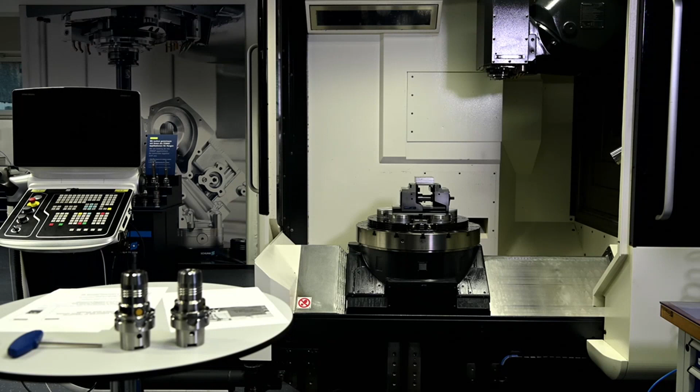Welcome, ladies and gentlemen, and dear guests of IMTEX 2023, to my talk about Schunk intelligent tool holding and work holding solutions and how they increase productivity of unmanned intelligent machining processes.

We from Schunk, from the headquarters here in Germany, as well as from our subsidiary in Bangalore, India, want to illustrate a path towards more autonomy in industrial devices and machine tools by the use of intelligent components in the field of clamping and gripping technology.

When I started driving a car in the 1980s, I had to plan my road trips with a road map, and it was a completely manual process of planning and control. Later, I was able to use Google Maps for automatic planning of my trip, but still a manual control if Google Maps was able to manage the right way.

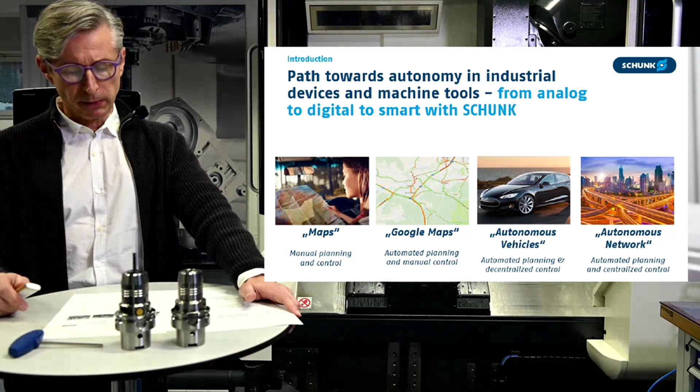Today, we can use autonomous vehicles for automatic planning and decentralized control. And tomorrow, we might have an autonomous network of automated planning and centralized control in our overall traffic.

This scenario is similar to the situation in machine engineering when working with machine tools. Even today, we use mechanical devices like tool holders, grippers, vices, lathe chucks, fixtures, whatever.

To make the best out of those mechatronic devices, it would be clever to equip them with additional sensor technology and let those sensors communicate with the machine control.

In a machine tending process, it's fundamental that the machine control knows if a clamping force block is opened or closed to avoid damage during loading. And monitoring systems should report the proper position of a workpiece inside a clamping device before the cutting process starts.

These connected intelligent devices are the basis for the final step: AI-enabled processes, online learning, connected machines for the future of autonomous solutions.

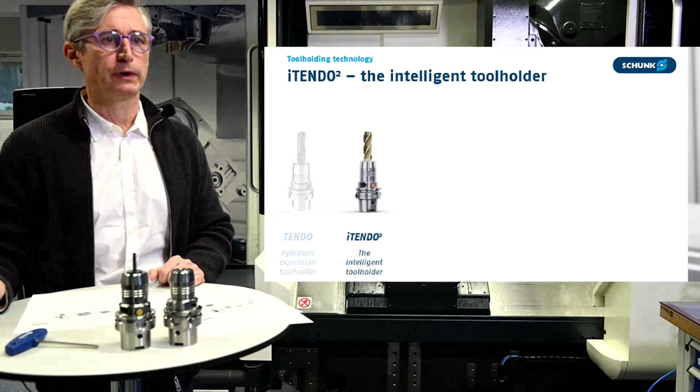We equipped this tool holder with some additional features and made the iTENDO² out of it. We integrated, in a first step, an acceleration sensor right in the middle of the center axis for monitoring vibrations occurring during a machining process.

And of course, we need a rechargeable battery for 8 hours of continuous work and 10 days of standby time. That all makes together an intelligent real-time sensor system for easy process monitoring and maximizing the tool service life of the tools you are using: drills, mills, other tools.

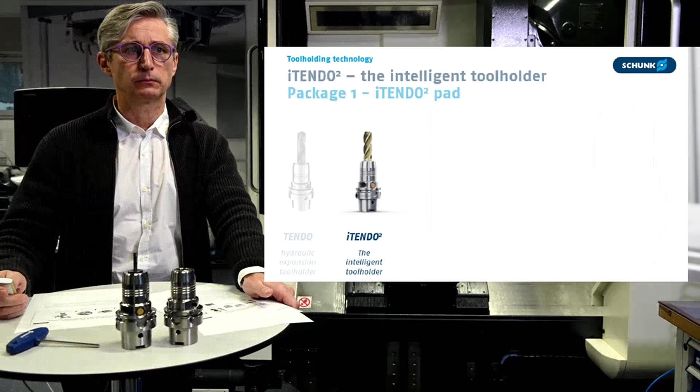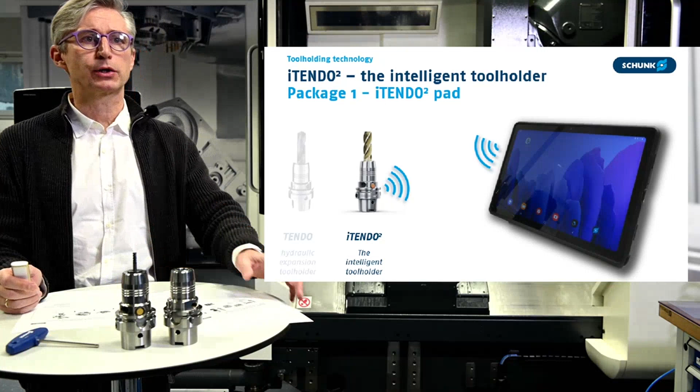To get a deeper understanding, you have to know we have 3 different packages of this iTENDO². Currently already on the market since last year is package number 1, which we call the iTENDO² Pad. So to have a better idea what is behind the iTENDO² Pad, let's have a look at the video.

You see, this is the case of how we deliver the iTENDO² Pad. The case has one of the iTENDO² tool holders plus a small tablet PC, and both can be connected via a Bluetooth system.

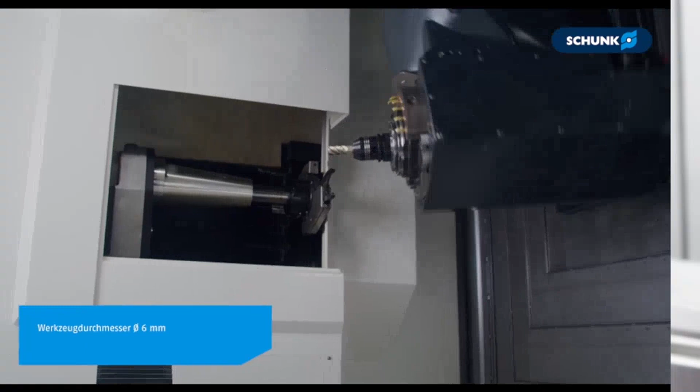Once the iTENDO² is connected with the tablet PC, we can monitor what we call the chatter marks. We started a process just by using the standard parameters recommended by the tool manufacturer, and we were able to see we have, of course, a certain level of chatter marks.

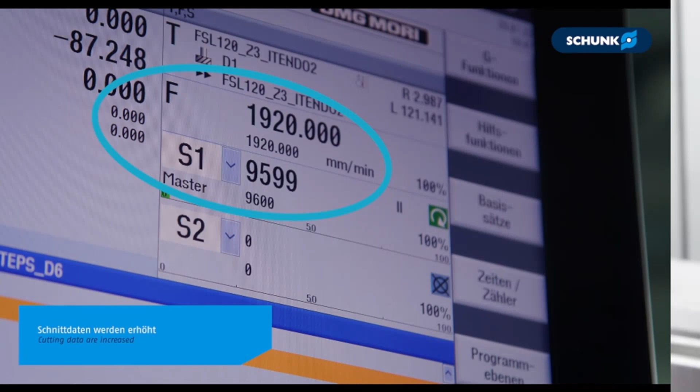Thereafter, we increased parameters, speed, and so on, and we were able to see the level of chatter marks even increased. So we can expect a shorter tool life and a less good surface quality.

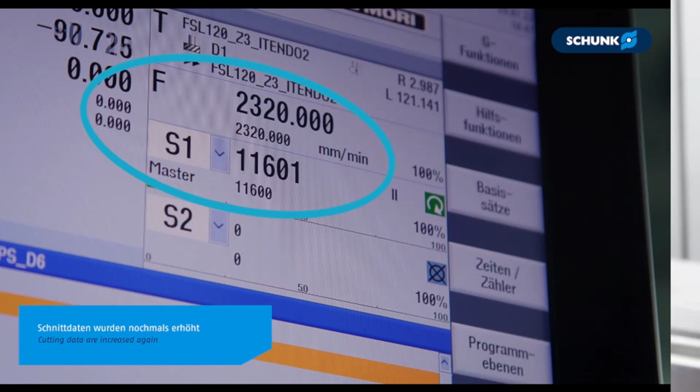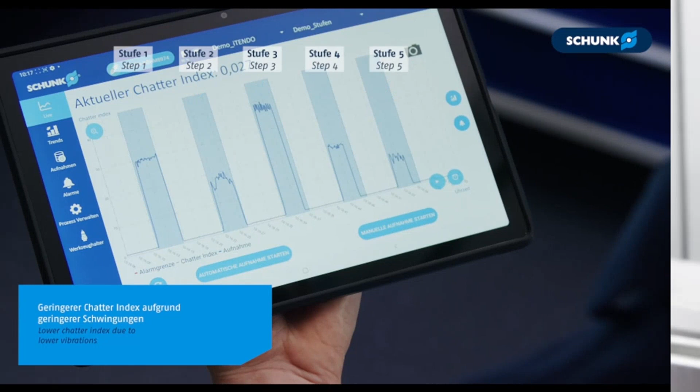But then we further increased the parameters to the next step so that we have an even faster process. And surprisingly, we were able to see that the chatter level, the level of vibrations, went down dramatically.

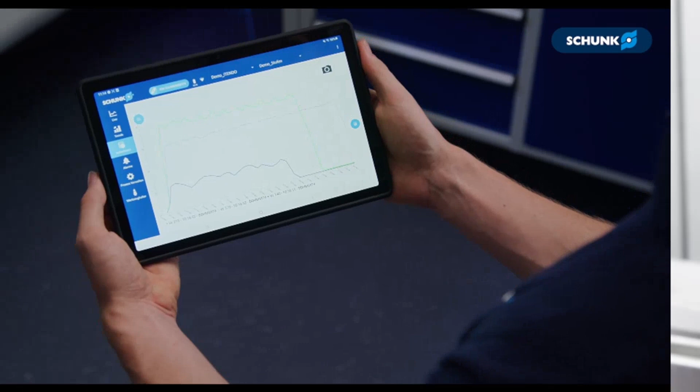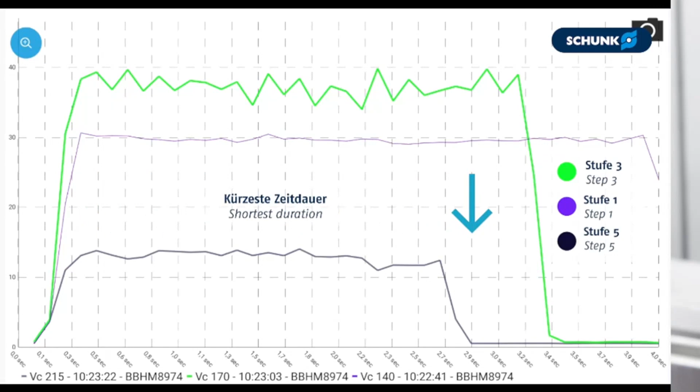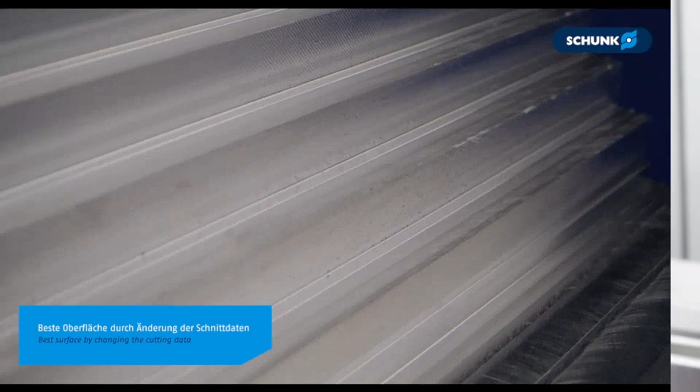So you can use the tablet PC to compare the different results. You see we have step 1, 3, and 5, and in the last step, step 5, we had the shortest duration of the process and the lowest level of vibrations. So this first package, the iTENDO2 Pad, gives you excellent manual control to adjust your cutting processes.

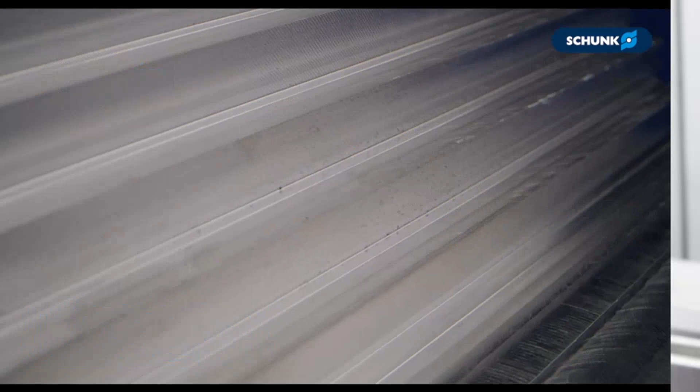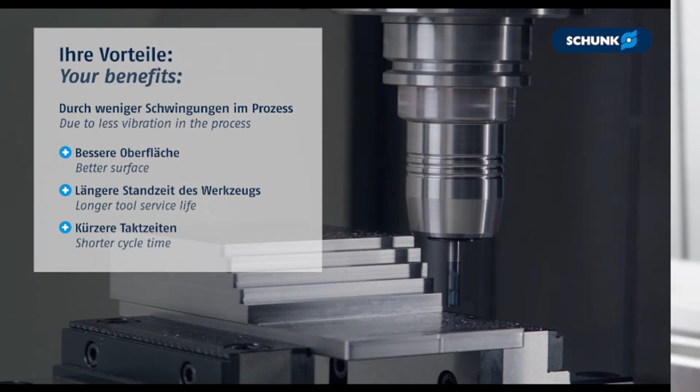It doesn't matter if it's a drill process, a milling process, a reaming process, or a brushing process - it's possible as well. The result from using the iTENDO2 is normally a better surface, a much longer tool life, and of course we want to decrease the time of the cutting process.

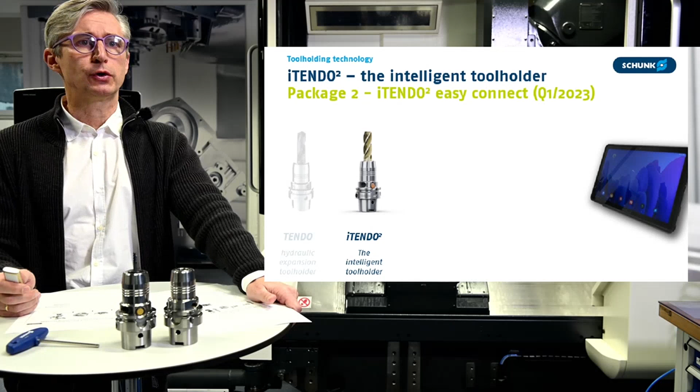The next step to be on the market in the first quarter of 2023 is package number 2, which we call iTENDO² Easy Connect. What's the difference to the first package? Even in this second package, we are able to connect the tool holder with the tablet PC. You see the Bluetooth signal is transmitted by a 10 Hertz signal.

But additionally, this feature offers - and within the delivery is a connect box we have to connect to the machine cabinet, and within the delivery is a wireless receiver. So with these components, we are able to additionally connect the tool holder, the iTENDO², with the wireless receiver, this time with a 100 Hertz signal. And the wireless receiver is connected with a cable, of course, to the connect box.

So now we are additionally able to give out an analog output signal between 0 and 10 volts to some external devices, so that we can even use other monitoring systems and add our system, giving us even deeper knowledge of the process quality.

And of course, the connect box is connected to the machine control, because this time we are not able to just connect one tool holder - we are able to connect up to 64 different tool holders for different cutting and machining processes. So this package number 2 will come to the market end of quarter one 2023, and there is an update available from the first package.

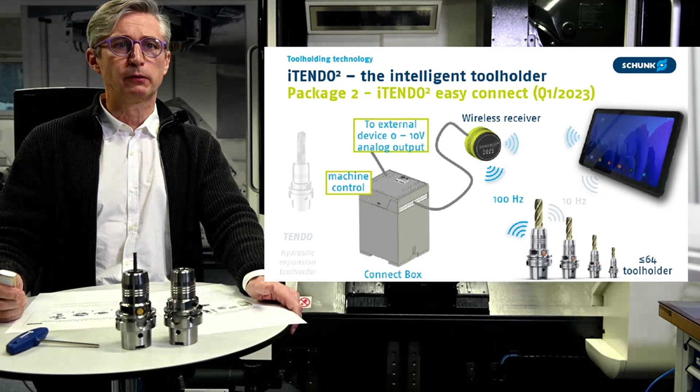The future step we are planning is already package number 3. We call it the iTENDO² Pro, but please remember this is still in development, not available within the next months and years. So it's just a development project.

But the idea behind this project is that, additionally to package 2, we integrate an edge device, a Schunk software solution with extensive functions. There will be more applications for specific processes, like a specific app for drilling, for reaming, for milling, for brushing, or even for some other processes that can be done in a machine tool.

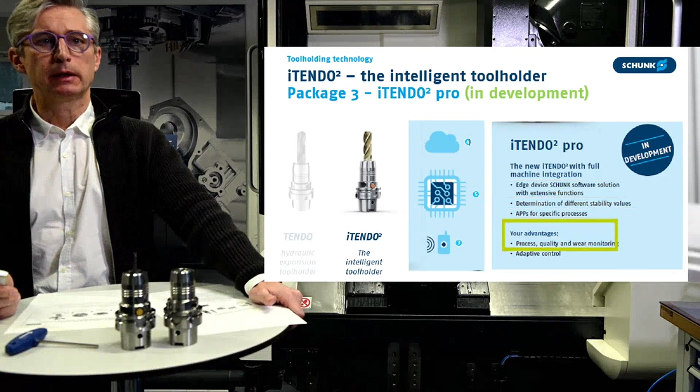And at the end, the idea behind this is that the machine is able to control itself, the cutting processes within self-set limits. So we'll have process, quality, and wear monitoring of the system, and an adaptive control of the whole process, so that if you have unmanned processes, you have an improved system to stay within the right limits and parameters for a perfect cutting process.

So this is the idea about the 3 packages of the iTENDO² tool holder, the intelligent tool holder.

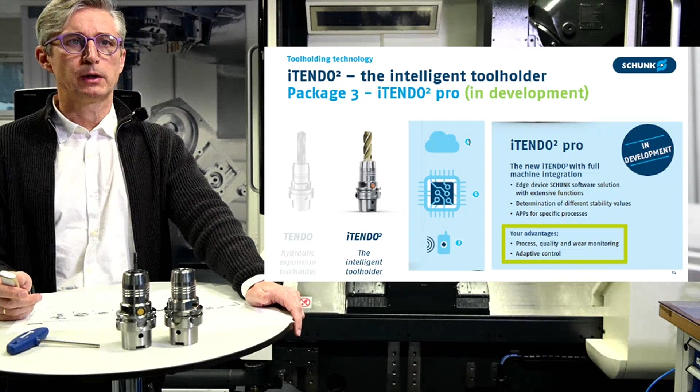Let's change to our setup time killer, the Vero-S quick change pallet system, or as we call it here in Europe, the 0-point system. To give you a first idea of a 0-point system from Schunk, let's have a look at the animation first.

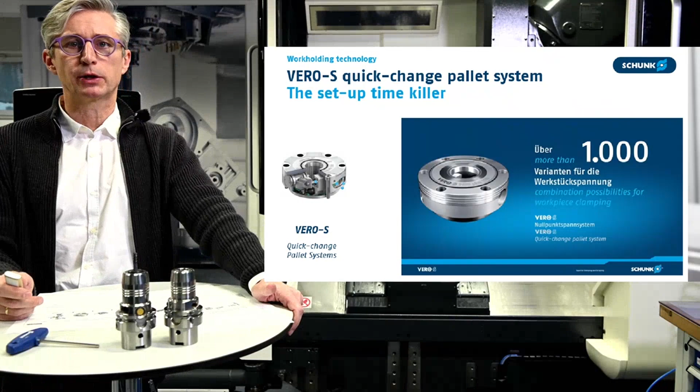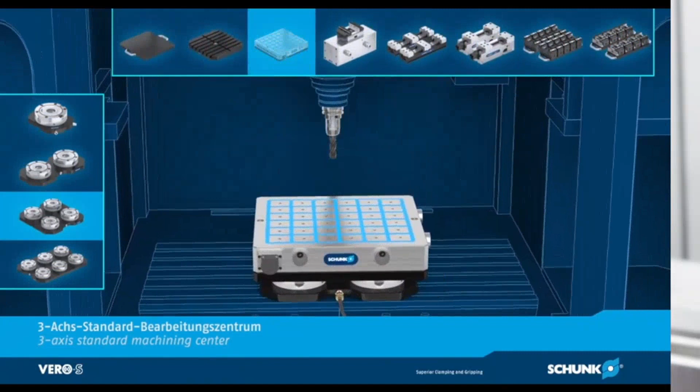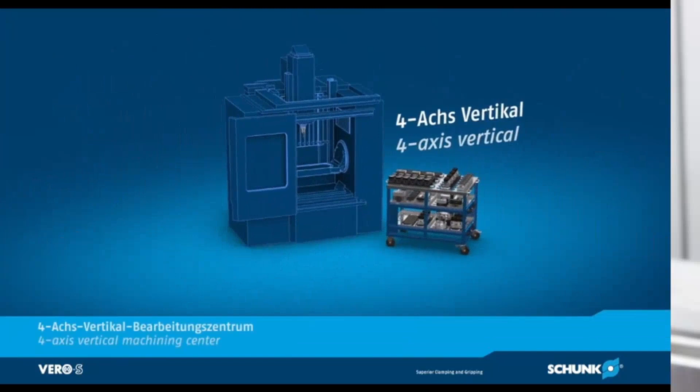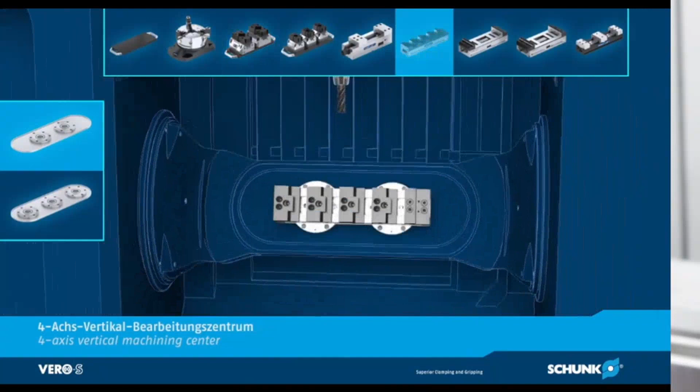The Schunk quick change pallet system allows you to retrofit all types of machine tools with products like 4-way, 6-way, 2-way modules, so that you can integrate your clamping devices simply. It's possible to use mechanical vices as well as pneumatic clamping force blocks, magnetic chucks, vacuum chucks - whatever your machine needs. And you see, these components are available for 3, 4, and 5-axis machines.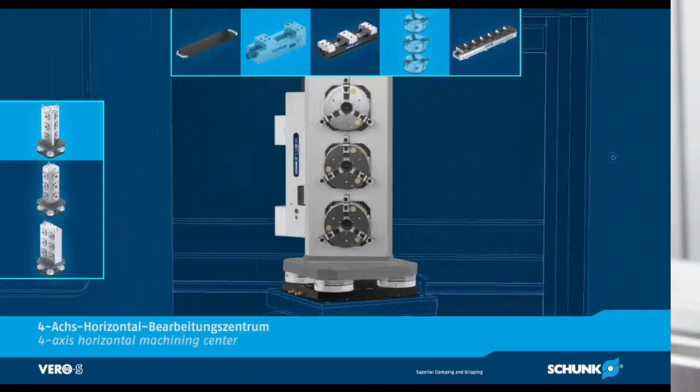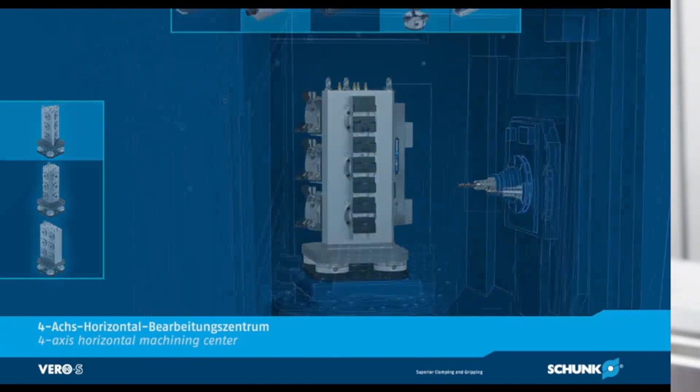What is mainly interesting is that by using a quick change pallet system, you can widely use multi-workpiece clamping solutions to increase machine time and cut down tool changing times, for example. So this is really our key technology for improving machine processes.

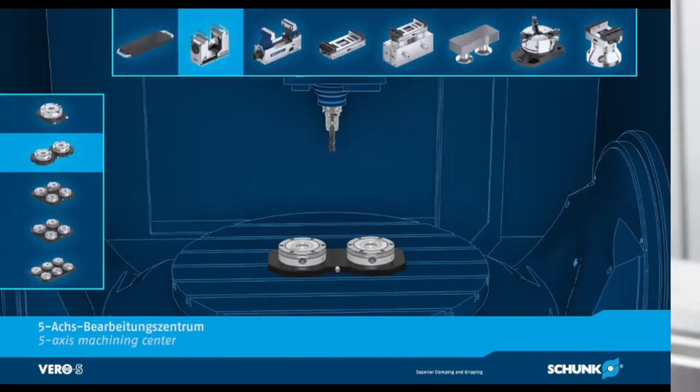Even here for a 5-axis machine, like we have behind us in our collab at Lauffen, we use a 0-point system, a quick change pallet system. This time for a 5-axis machine with a turning option. We see it next.

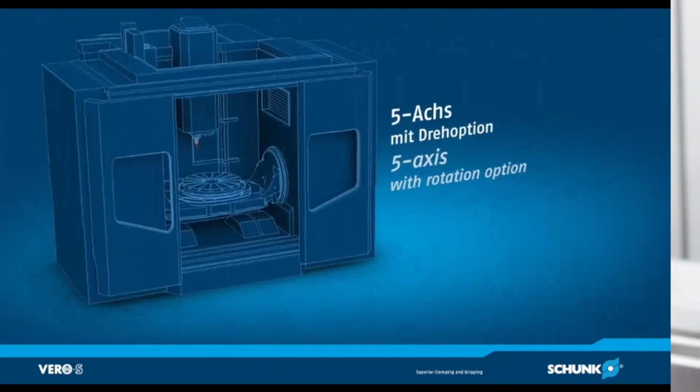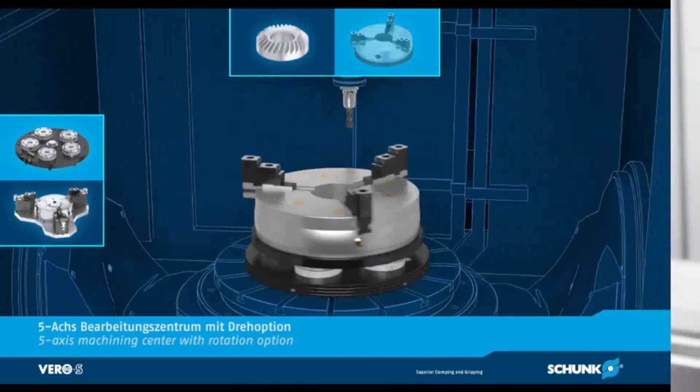So we have a setup card as well, and we use different types of clamping devices, manual devices as well as pneumatic actuated ones. You can do a direct workpiece clamping, so you have an even wider spectrum of options to use your machine tool. But this is just, let's say, the simple manual use of a quick change system.

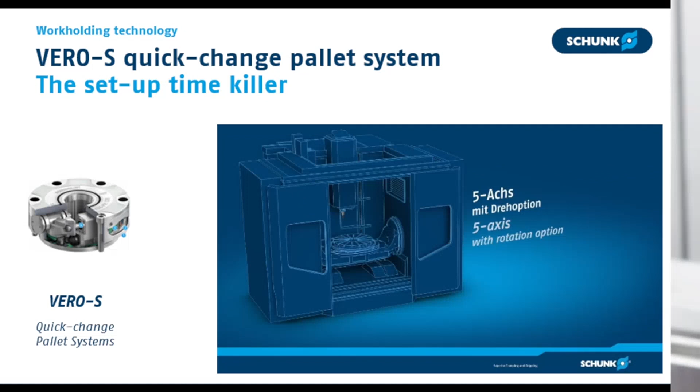Of course, we can do what we do here in our collab, a manual loading. Just have a look at the machine behind. You see our machine table equipped with an appropriate solution for the 5-axis machine with a turning option. And then we are free to change our devices within minutes.

Just imagine we don't have a quick change pallet system on a machine. It takes 15, 30, sometimes 45 minutes to change the setup. And this time we can dramatically reduce by the use of the quick change pallet system.

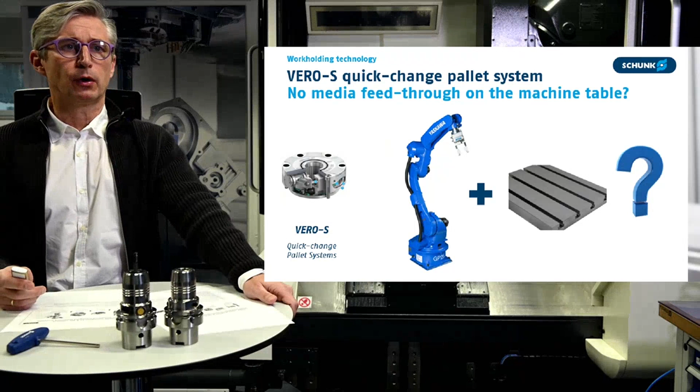But what if your machine has no media feed-through, but you want to automate your machine with a robot? How can you use pneumatic clamping force blocks, and how can we use such a system without a media feed-through, pneumatic pressure for example? So let's have a look at the next video.

There are some components from Schunk. All are within the range of standard components. You see, we need a 0-point system. We need a pallet, a smaller pallet with pneumatic clamping force blocks. And there are some other features I want to present you right now.

Here is an example for automation of machine tools without media feed-through. And now the air pressure comes via the robot coupling. To open our system, we need 6 bars of air pressure.

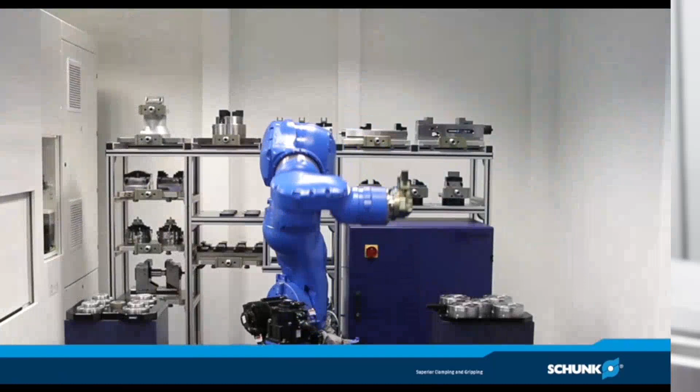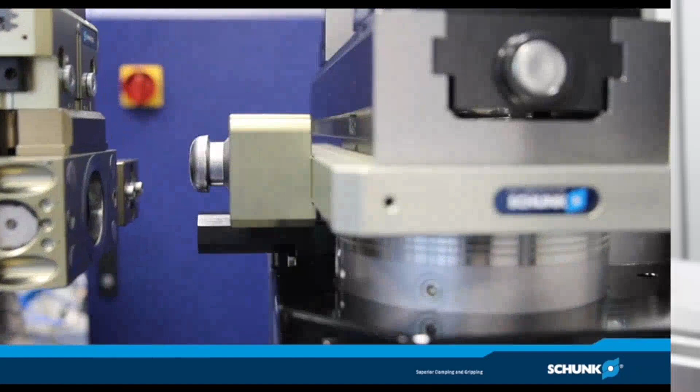Now the 0-point system, you see, it's open. That allows us to put on the vise, for example, or a pallet with several vises on the interface. And now with the air pressure, we release the air pressure and the inbuilt spring system will clamp and position the vise and pull it down for very rigid stability.

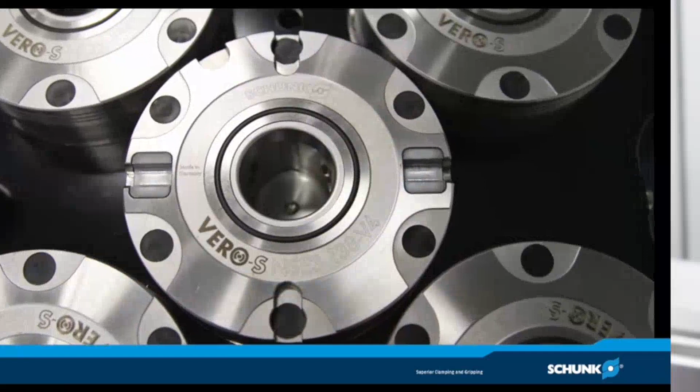So you see, although there is no media feed-through on some of your machine tables, you can use an automatic loading, machine-tending solution with a robot. And here we have a single pallet, for example, and we have the appropriate modules with anti-twist protection, not only to clamp the pallet but even to position it within very tight tolerances.

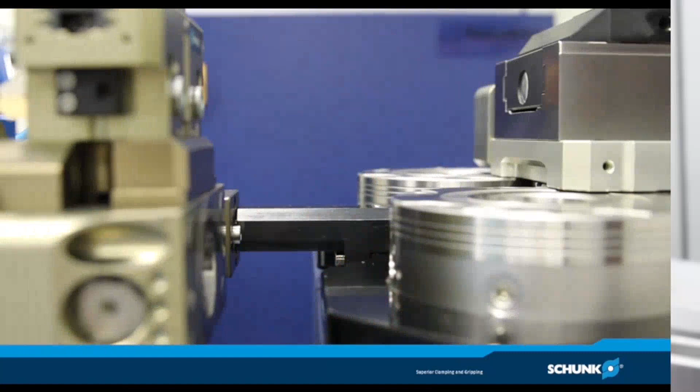The majority of those applications, our customers use mechanical vises, where we prepare the workpiece parallel to the machine time, to the main time of the machine. Then we have this pallet changing system, and we just exchange the vises with the workpieces. But of course, there's the option as well to use pneumatic actuated clamping force blocks or even magnetic chucks.

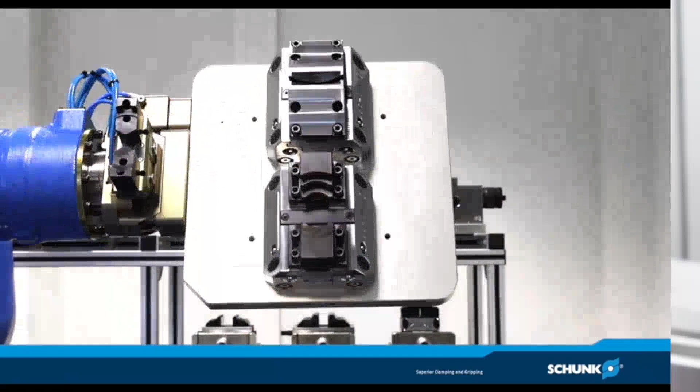So let's have a look at the system, how it works here. The quick change pallet system is open, that means there's already 6-bar pressure. There's a pressure maintenance valve integrated in the system to keep the modules open, and the actuation of the pneumatic clamping force block is done via the robot coupling.

Now we close the 0-point system. You were able to see the pull-down effect. And now there's even the option to use a Schunk gripping system to load the workpieces inside the pneumatic clamping force block. So even this is possible, that you don't have to change your pallets all day long - you can just change the workpieces inside your clamping force blocks.

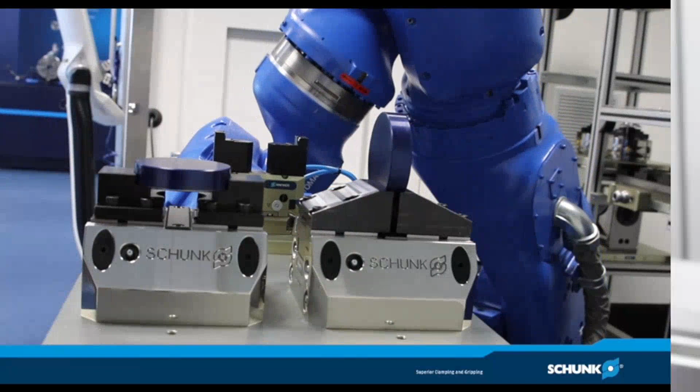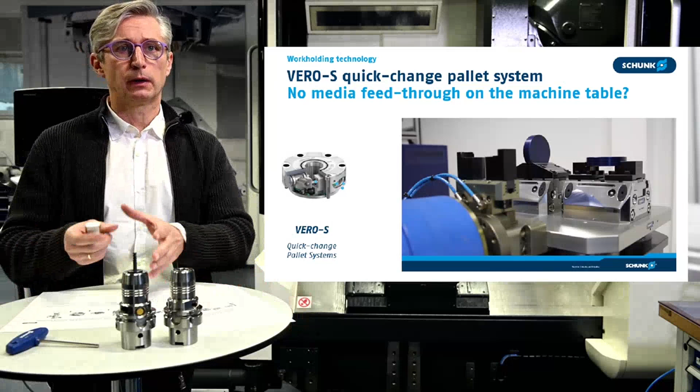So this mixture of standard components, the modular system, gives you a great freedom for all types of applications dependent on your amount and size of workpieces.

But interesting to see for the present and future of those quick change pallet systems is not only a pneumatic actuation - there are already electromechanical actuation possible with 24-volt technology. And this opens us new fields of application, even outside the machine, where no pneumatic pressure or hydraulic pressure is available.

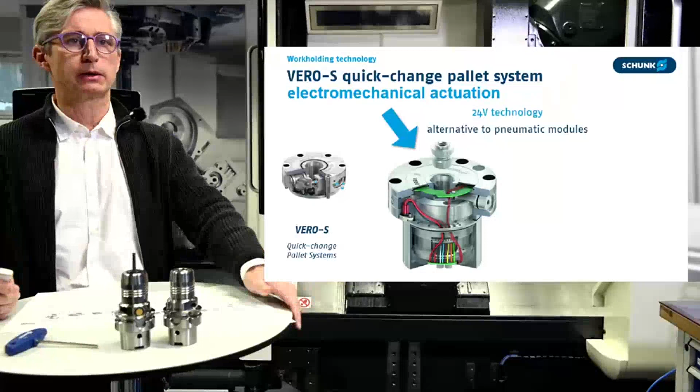And I will explain you later, within the next minutes, there are already integrated electronics for monitoring the position of the pallets, the position of the clamping pins inside, and the control is done via an IO-Link system, and you can integrate this system within a field bus.

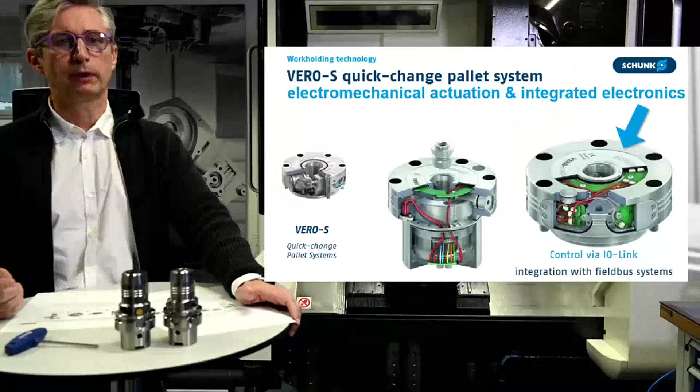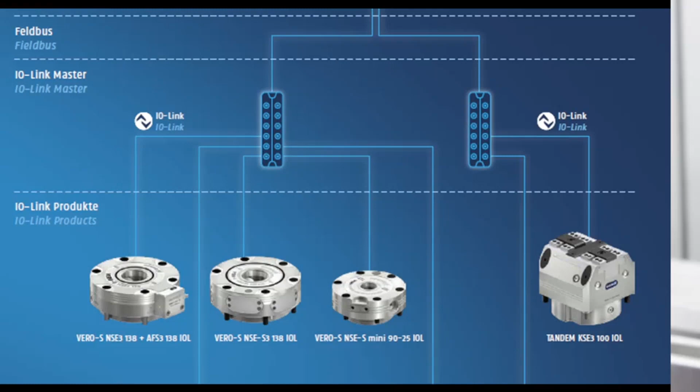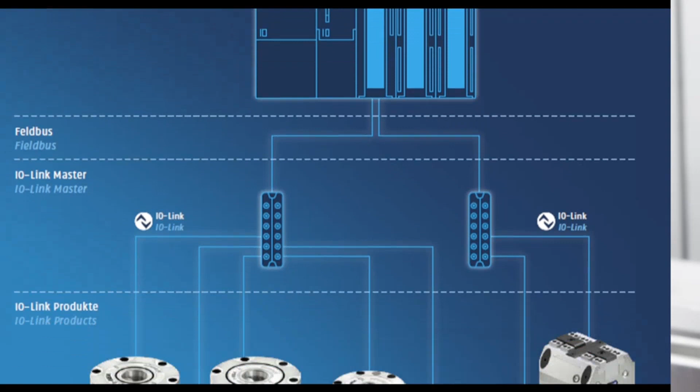This IO-Link master you can connect via field bus to the machine control without any problems. So we can add those electromechanical components, quick change pallet systems, as well as clamping force blocks with the IO-Link master to the machine control. The field bus system is really flexible for several types of machines.

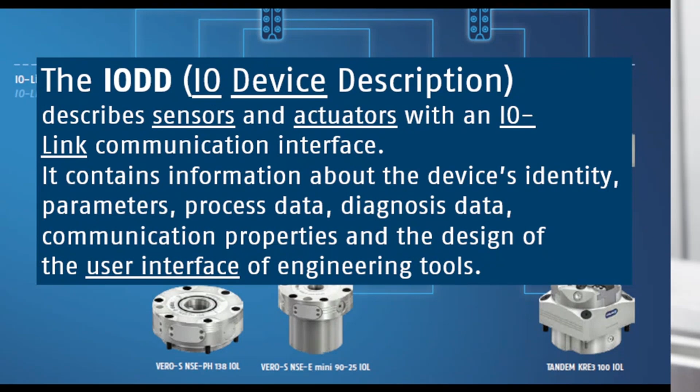All those new electromechanical products are equipped with an IODD, an IO Device Description, because then the machine control can even monitor the wear of a component if it comes to a life end, for example, and then we can exchange those components. The IO Device Description allows the component to be changed to a newer component, and the parameters of the component are then automatically detected and given to the machine control.

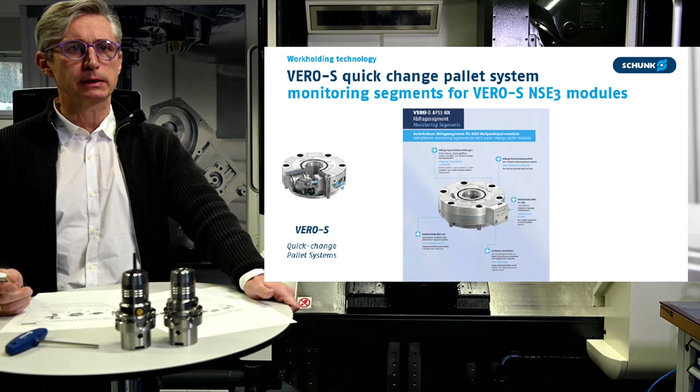There is a very nice retrofitting system for our quick change pallet modules. So let's have a closer look again.

There is a component you can add to the pneumatic systems of the quick change pallet system. The actuation is done via an IO link as well, and this allows clamping slide position, the position open, the lock position, and the lock position without clamping pin. It may be possible that it's closed and locked, but you can't load because there's no pallet on the system, so you can't start the machining process.

Furthermore, there is a pallet monitoring system, because an inductive sensor proximity switch allows monitoring whether the pallet is in the right position or not.

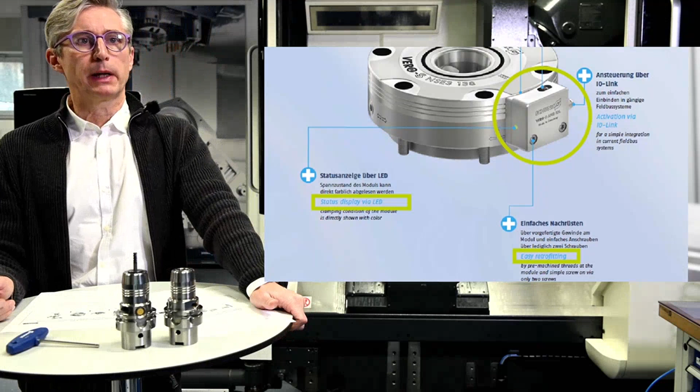Furthermore, the retrofitting is really easy. You just need to order the additional component, and with 2 screws you can add it to a standard component. Then with the cable and the IO link system, it's connected to the IO link master. There is a status display connected to the component, so you can always see manually, just by looking, the current status of the system.

Finally, I want to give you two applications of Schunk Smart Gripping. Here's an application we just made for a customer in our Collab Hausen, where we can offer those services to test applications in the field of smart gripping. Let's have a look.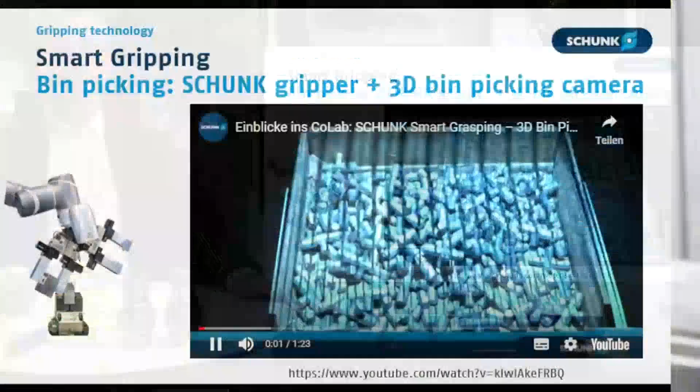This is a vision system, not from Schunk, from one of our system suppliers for vision systems. There is one of the orange robots this time, equipped with some Schunk gripping systems, and the combination of the robot control, the Schunk gripper, and the vision system allows a real bin picking situation.

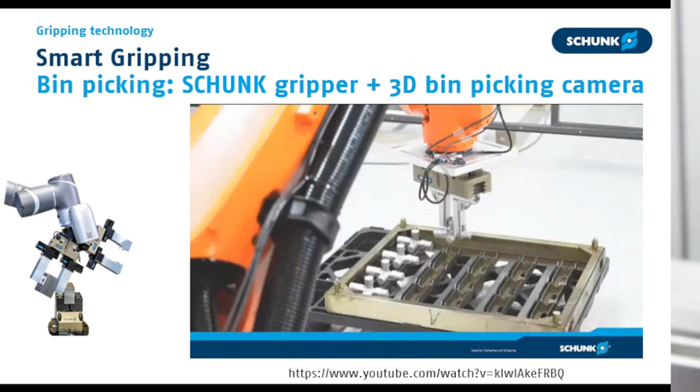You can imagine that we don't just take the workpiece out of the box and put it onto a pallet. We can even now load a machine tool in that way. Let's say this is the standard nowadays where we can offer bin picking solutions.

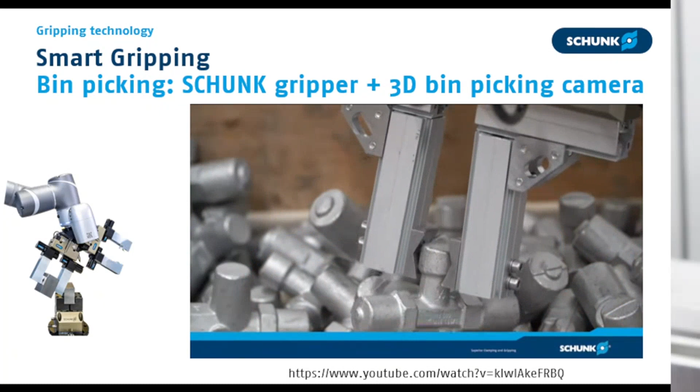And if our customer is not fully sure whether we can pick their components, because they're even more difficult to grip, then we can offer a service where we make a test with your workpieces in our CoLab Hausen for gripping systems.

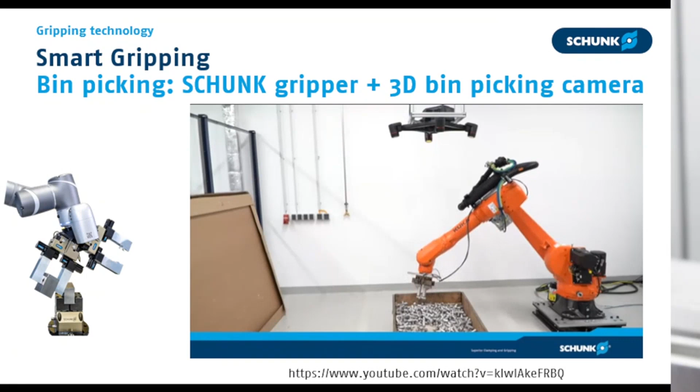Furthermore, I want to show you an application that gives you an idea of what is possible in designing up-to-date gripper technology. It's not just fingers closing and opening—there are many more functions available today.

Have a look. This is a real flex gripper here with some suction cups. You can position those suction cups with the fingers in different positions for different contours.

And now we use the gripper as a two-finger parallel gripper, and can load smaller workpieces we can't handle using vacuum gripping technology.

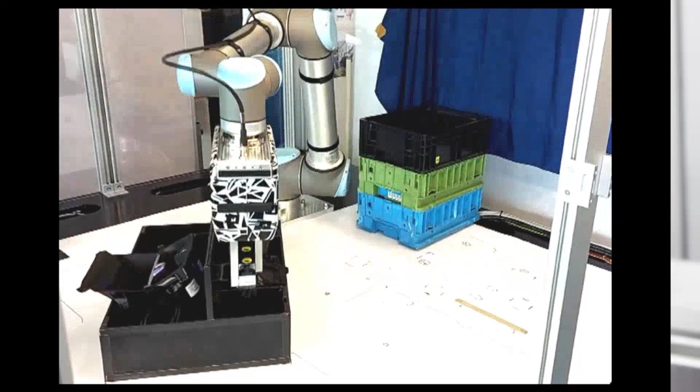Finally, we have to handle the boxes, and so there's integrated technology for box handling inside this type of special gripper as well.

Summary. I hope you liked my presentation about smart and intelligent products and services from Schunk for unmanned, intelligent machining processes. I hope you were able to see that these are not just single products we offer to the market, but a real, great modular system. The future perspective is, of course, to combine all those components with the machine and robot control to take more data out of the process, even for machine learning, so we can have more autonomous systems in the future as well.

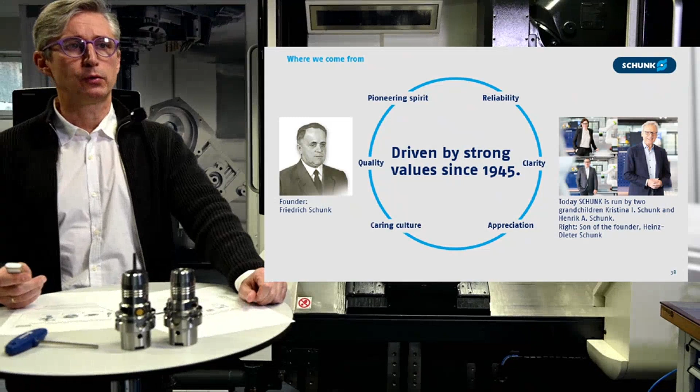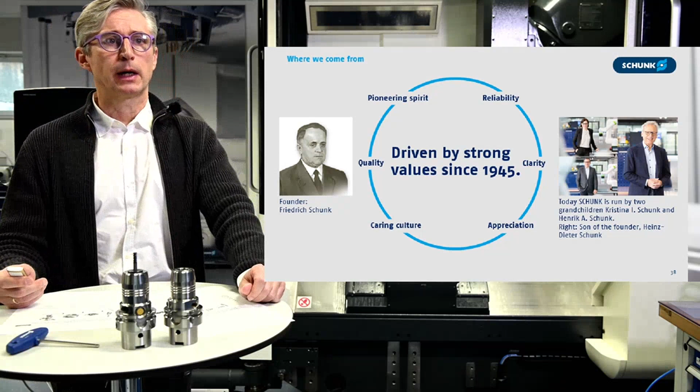Let me introduce the company Schunk to you. Schunk is a family-managed company. On the left side you see the founder of Schunk. The company was founded right after World War II, in 1945, by Friedrich Schunk. On the right side you see Heinz-Dieter Schunk, his son, but the company is managed by Heinz-Dieter Schunk's daughter, Kristina Schunk, and the son, Henrik Schunk. We are all driven by very strong values since 1945.